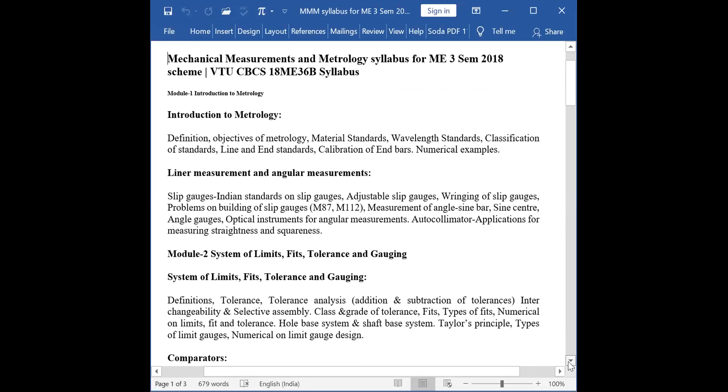So for your test, you'll be having introduction to metrology, linear measurement and angular measurements. The second module, which we dealt with, covered limits, fits, tolerance and gauge designs, comparators as well - that will be the portion for your test. Later we covered module 3 related to screw and gear tooth measurements, and then we dealt with measurement systems and basic concepts of measurement methods with respect to transducers, modifying and terminating devices. So this we have completed.

So the fifth module deals with applied mechanical measurements. In this, which are the applied mechanical measurements we are going to measure? These are the measurements of force, torque, pressure. Then the type of dynamometers comes into picture.

I'm sorry, it got disconnected. Okay, so this was module 4 completed. In module 5, we deal with the measurement of force, torque, pressure and types of dynamometers, and the use of elastic members. We study how a Bridgeman gauge works and other types of gauges.

And we have measurement of strain and temperatures, where you will study thermocouples, the pyrometer, optical pyrometer, how it works, how an electrical strain gauge works, what is the preparation and mounting of strain gauges, the formalities used, how to determine a gauge factor. So all the things associated with strain and temperature measurements we will be studying in a different part. So these two cover our module 5.

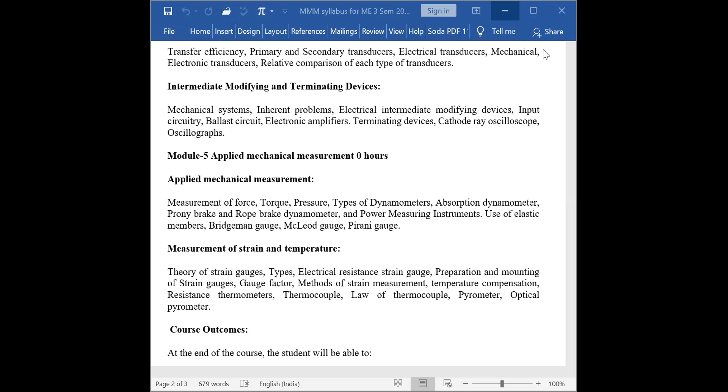So now let us share the PPT related to our 5th module. This is the module we are starting, related to applied mechanical measurements. I discussed the syllabus with you already.

So now you should know what do you mean by force. Force you have studied right from your 9th, 10th, plus 11th and 12th also. So how do you define a force? As per Newton's law, force is nothing but mass into acceleration, which is measured in the unit of newtons. So whenever you apply a force on an object, it will help in getting a direction for the movement or for a rotation, and it could also increase the acceleration rate as well, right? So basically the object accelerates due to pulling or pushing with the application of a force.

So this is the direct measurement of force and the general concept of how a force is being defined. But now we have to focus on measuring the force also. So in order to measure force, there are two methods: one is the direct method and the other is the indirect method.

What happens in the direct method? This involves a direct comparison with a known gravitational force on a standard mass, for example a physical balance. It compares with a standard. You add the standard in one plate and keep the quantity you have to measure in another plate. Then you verify by the movement of the spring, whether it is balanced, or showing deviation towards the unknown quantity or towards the standard. By that you vary and check.

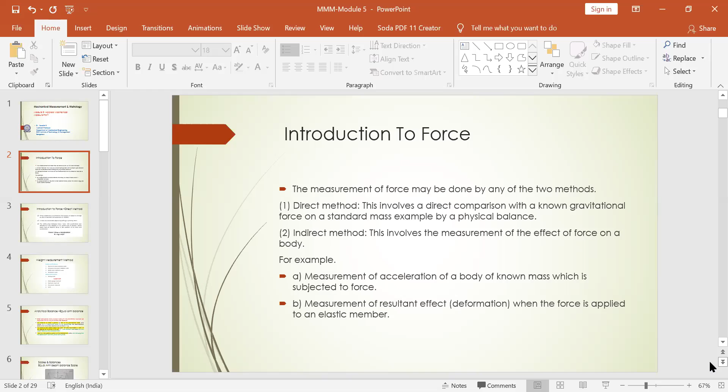So these are the two ways of measuring force: one is the direct and the other is the indirect method. This is the actual picture of what you mean by force and how it is being measured.

After this, we have some classification and different methods which are followed. When a force is applied, what is the effect? If a load is applied, what happens within the body, and how do you measure it? For everything you should have a measurement method. So it can be classified into 2 to 3 categories.

One is the scale and balance. This comes under the analytical method basically, which is measured with the help of scales and balances only. Under that we have different classifications: equal arm beam balance scale, unequal arm beam balance scale, multi-lever platform scale, and pendulum scale.

So everything here is measured with the help of a balance scale, and hence it comes under the category of scales and balance. With the help of scales and balance you are measuring.

Next is based on the elastic force meter. If you use some external elastic force for measuring, which type of measuring instrument do you have? It is only the spring scale method. Apart from that, you have a different unit called a load cell. When you apply the load, what is the measurement, how are you measuring, what quantities are you measuring? This will be analyzed by 4 different methods.

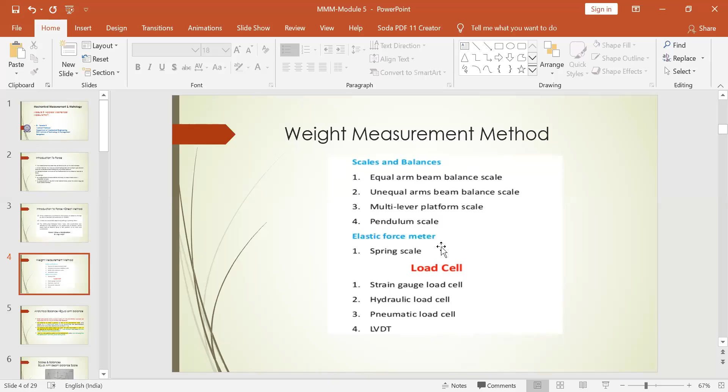I'll just focus on only one method for today: the equal arm beam balance scale. The rest could be taken care of in the next class. So what do you mean by equal arm balance?

Everyone has seen this: you have 2 equal arms at the center, and you have a pointer which shows the reading on the scale. On one side you measure the standard mass, and on the other you keep the unknown mass. If there is no deviation, if both weights are the same, then the pointer will not show any reading at all. Remember, the scale you will be using will be a calibrated one.

If you have variation in the unknown mass, or if the unknown mass is more than the known mass, then this side comes down and this side moves up, so you'll have some deviation shown by the pointer. If the unknown mass is less and the standard mass is more, then this comes down and this moves up, so again you'll have some deviation shown on the calibrated scale. You'll come to know which is more and which is less, then you vary accordingly to get an accurate comparison and mapping of the standard mass with the unknown mass.

So this is also called as an analytical balance method. You are not using any numerical type of calculations. It is just basically an analytical based one, and hence it is called as an equal arm balance, since it uses equal arms on both the sides to compare the standard to the unknown.

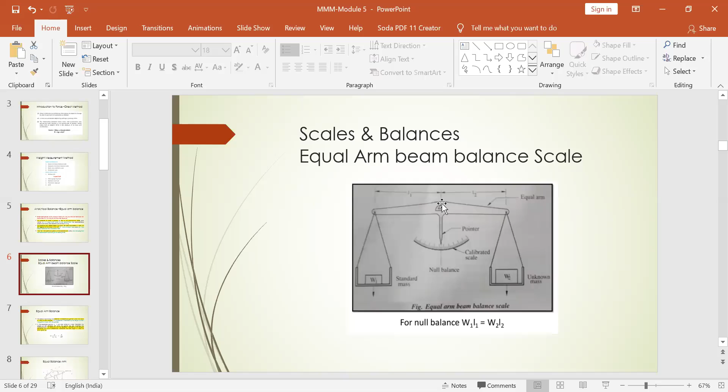Okay, so the constructional detail of the analytical balance is as shown in the figure that I have explained already. So what does it include? The balance arm rotates about the point O. So this will be the point O. I can show you one more image, the half section of it. So this is the point O on which the balance arm rotates.

Okay, and the two forces W1 and W2 are applied at the end of the arm, acting due to the weight applied towards the gravitational force. W1 is an unknown force, and W2 will be the known force due to the standard mass. So you always keep the unknown force at W1 and the known force at W2.

So point G is the center of gravity, the CG of the balance arm. So this is done. And everything goes on if W1 is equal to W2. But if the balance is in an unbalanced position, when the forces W1 and W2 are unequal, this unbalance is indicated by the angle theta. Any variation in the weight of the known and the unknown mass will be shown in the calibrated scale as theta.

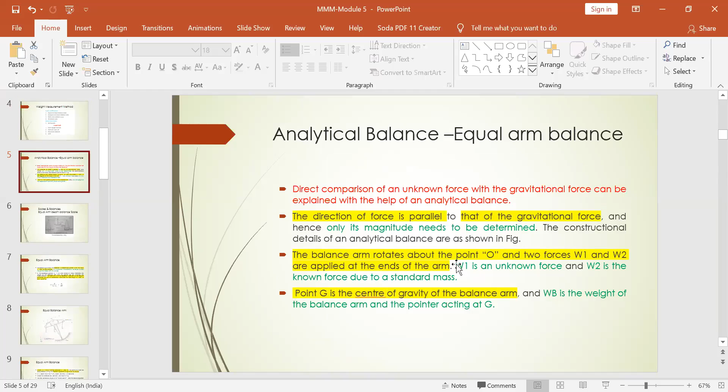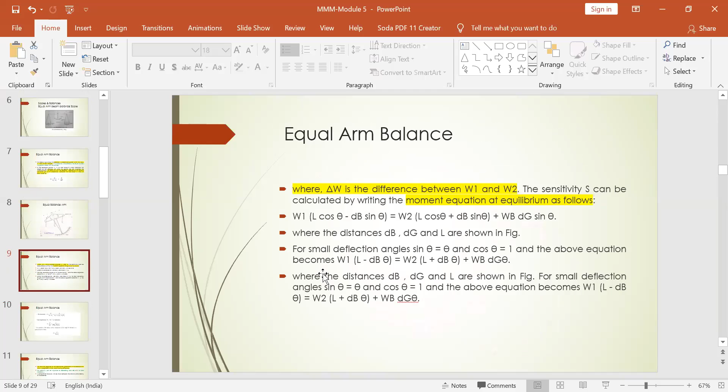So if they ask you to explain the equal arm balance and how you calculate its sensitivity, you have to explain what you mean by it. You have to draw the sketch. You have to show how sensitivity is evaluated, and if needed show the weights, how you resolve and apply the moment equation at equilibrium, how you correlate this moment equation to the sensitivity, and show finally that it mainly depends upon the weight being provided to measure.

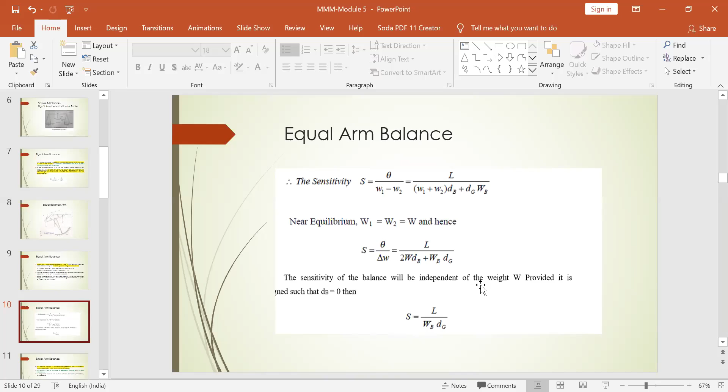So the given weight could be equal to the standard mass, or you might have a lesser weight than the standard, or more weight than the standard which has been given to measure. So based on the weight provided, the sensitivity factor will vary. So this is how you have to understand and explain the equal arm balance.